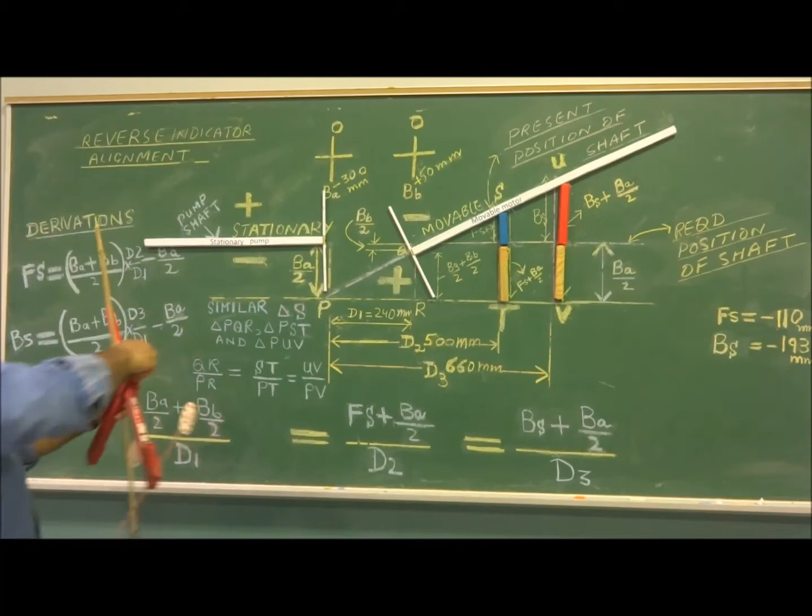Today we will discuss about reverse indicator alignment method. In reverse indicator alignment method, we make the alignment in one step, both for angular misalignment and for offset misalignment. Although we are taking readings on the rims of the couplings, we get the solution for both angular and offset misalignment. We are not taking any reading on the face. Today we will discuss about reverse indicator alignment method. I will discuss only vertical alignment method.

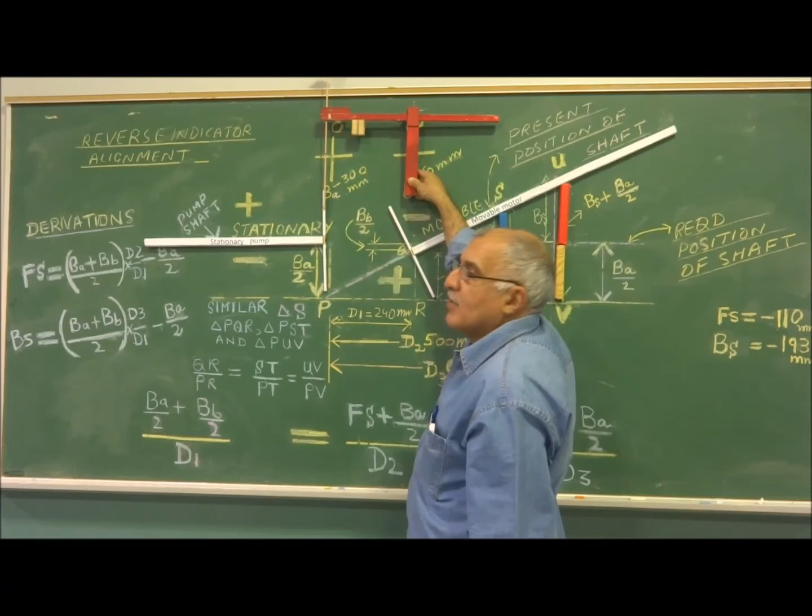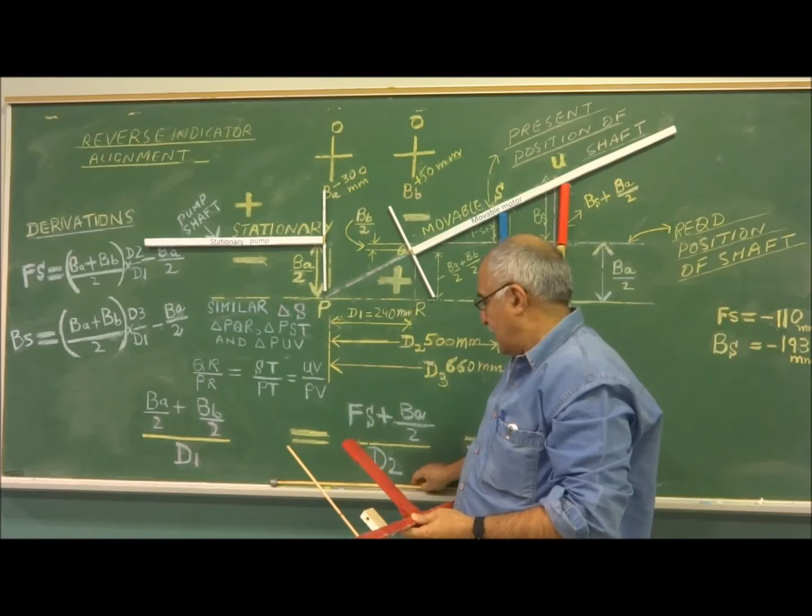Vertical means up and down, and I will tell you how we derive these formulas and how we make alignment. So in reverse indicator alignment method, we use two dial indicators. With one dial indicator, we take reading on the stationary unit. Stationary unit means where we are not going to add or remove the shims. So we make 0 on the top, and then we go to the bottom, and then we take the reading on the bottom side. This is our total vertical reading, which is called BA.

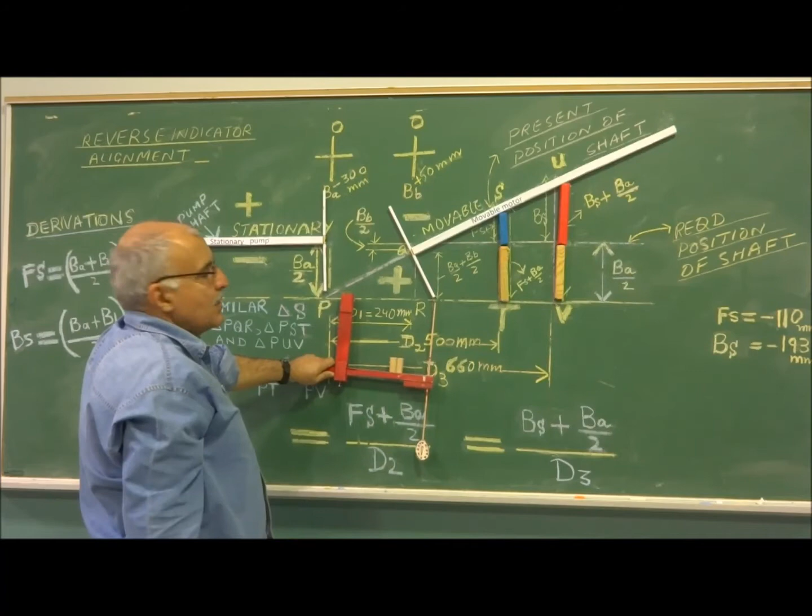Here you can see it is minus 300 millimeter total reading. In the same way, we take another reading on the movable side. We make 0 on the top, and then we come on the bottom, and this is the total offset reading with dial indicator, and this is called BB. BB is the reading taken on the movable side. This is total vertical reading, offset reading by dial indicator. Movable unit means where we are going to add or remove the shims for making alignment.

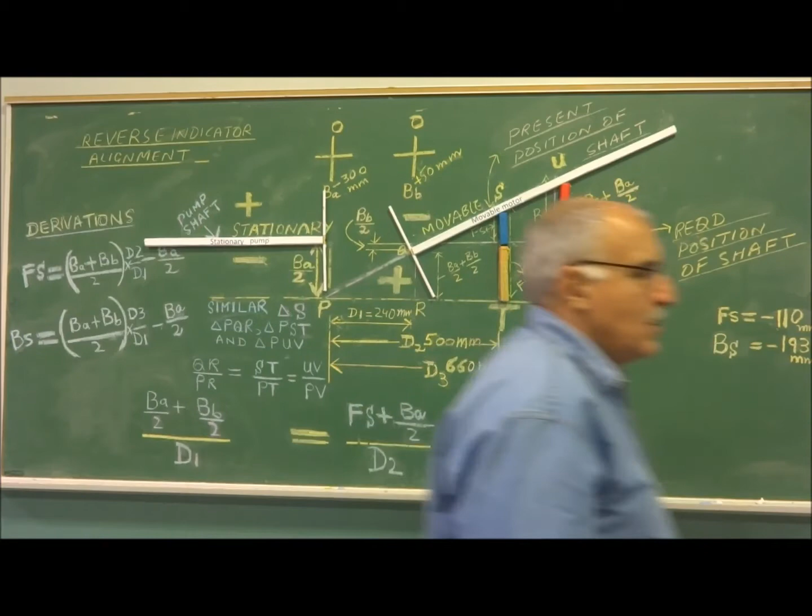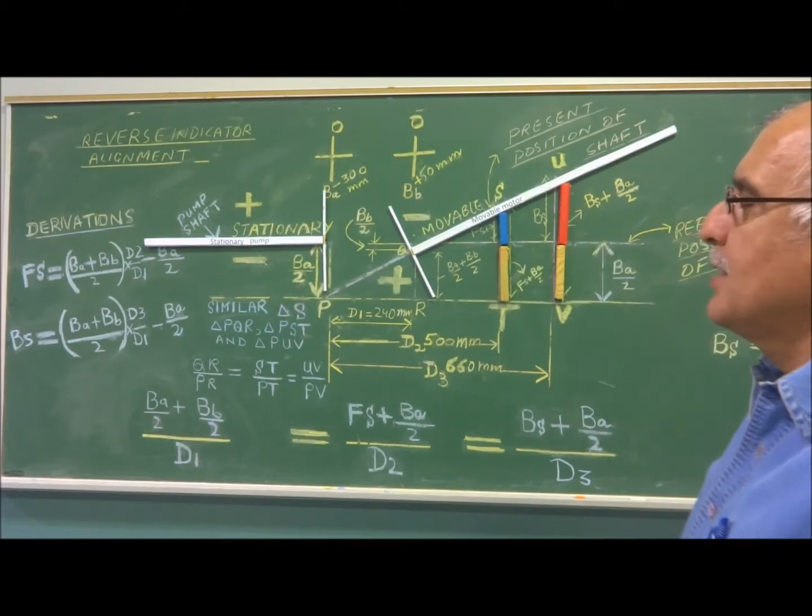Now for making alignment by reverse indicator method, when I say that we will make alignment, it means that we will make alignment for both angular misalignment and for offset misalignment. We will make correction for the offset misalignment, and we will make the correction for angular misalignment. Although we are not taking any reading on the face, remember, we are taking both readings on the rim of the coupling. You can take the reading anywhere, but we don't take this reading on the face.

So one is stationary machine and the other is movable machine. Movable machine is the one where we are going to add or remove the shims on the front and back foot for making alignment. Stationary machine is the one where we are not going to add or remove the shims.

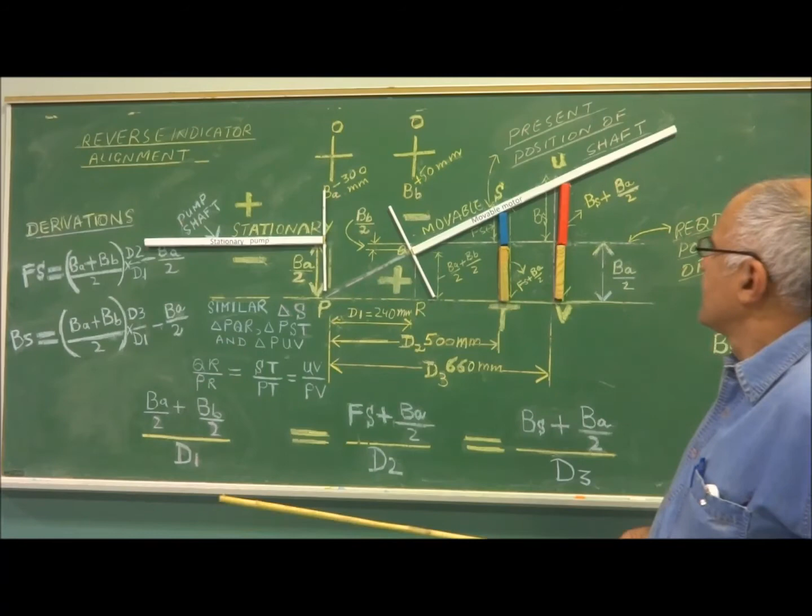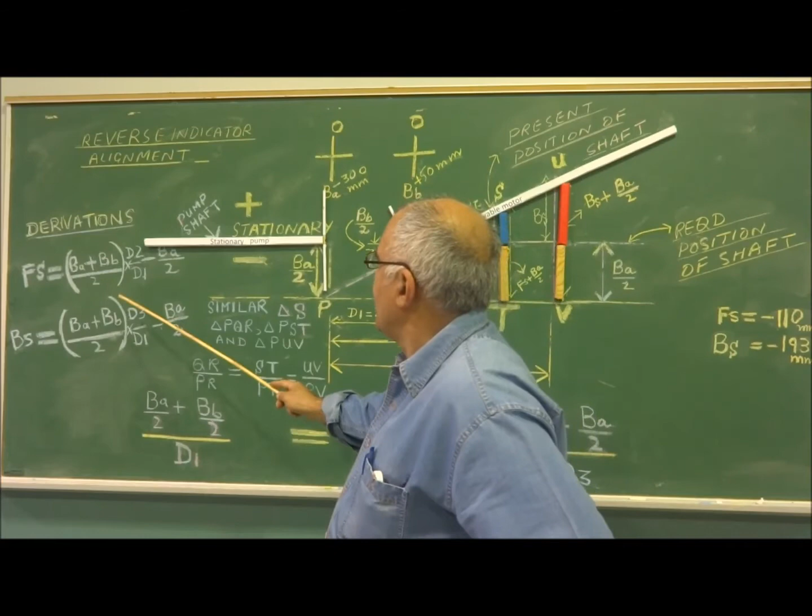So for finding the amount of shims for making alignment, we use these two formulas, Fs and Bs, and you can see here there are 5 terms which are used in these formulas: BA, BB, D1, D2 and D3. So total there are 5 measurements which you have to make for finding the amount of shims for front foot and back foot. Now in this method, when you take the readings from dial indicator, make sure that the front foot bolt and the back foot bolt are tight.

Otherwise you will get wrong dial indicator reading. And also you have to make correction for the soft foot. First you have to check if there is a soft foot, and if there is a soft foot, you have to make correction. This is very important. Otherwise you cannot make alignment. And then you will make rough alignment, because sometimes the readings are out of the range of dial indicator. So you have to do rough alignment before you use dial indicators. So how we are going to make alignment by reverse indicator method, this I will explain you.

We need total 5 measurements for finding the shims. BA is one measurement. This is the dial indicator reading on the rim of the coupling on the stationary side. This is the total offset reading. We make 0 on the top and then we go to the bottom. The second measurement is BB. BB is the reading taken by dial indicator on the rim of the coupling. We make 0 on the top, then we take the total reading on the bottom. Here BB is plus 50 and BA is minus 300. This is the front foot, this is the back foot.

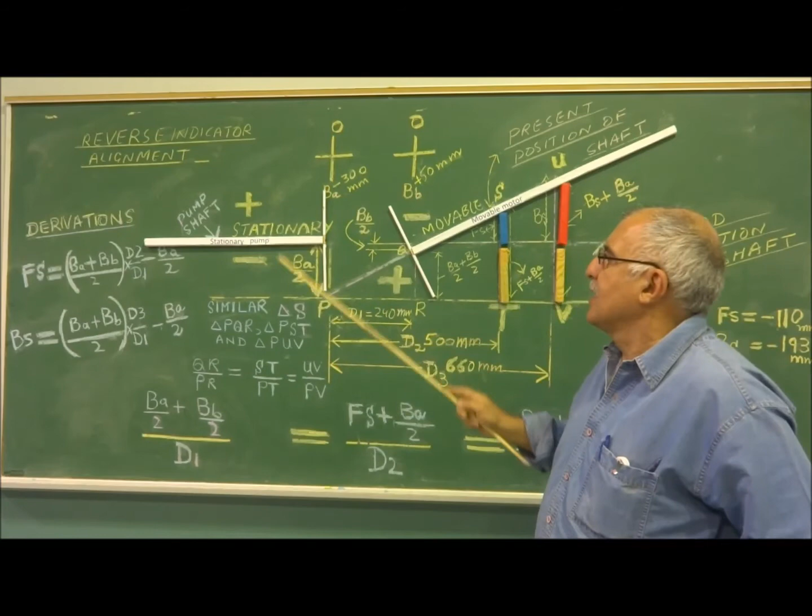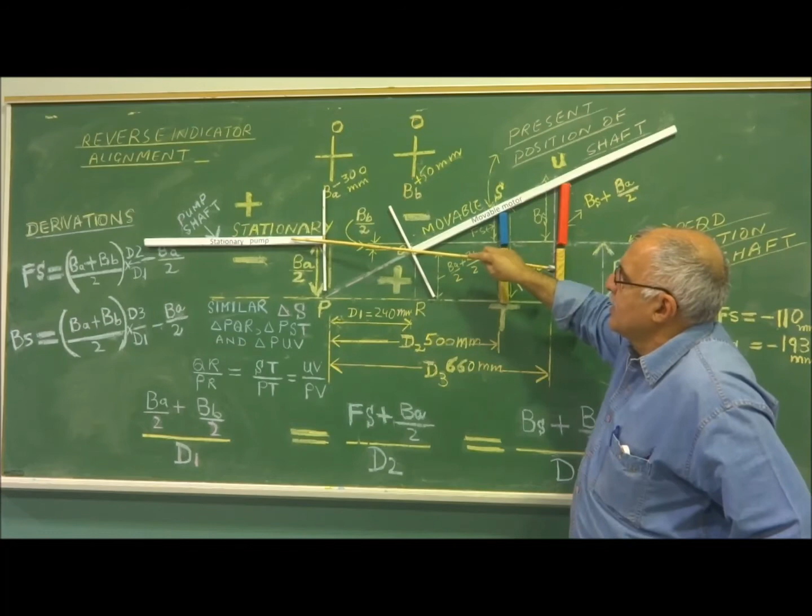It will stay where it is, and its rotating line will be taken as a reference line. So we have to move this movable motor in the same line as the rotating shaft line of the stationary machine. This is our main reference line, and we have to move this motor shaft in the same line as the stationary machine shaft line, which is, you can see here, this is the required line, and this line is in the same line as the stationary pump shaft rotating line.

So this is called the required position of shaft, and this is the present position of shaft. Movable unit means where we are going to add or remove shims for making an alignment. So why do we write here minus and plus and minus and plus? I will explain that.

If you take the reading at this point from the dial indicator, and the alignment fixture is fixed on the movable machine, then if you get a minus reading, it means the shaft will be passing below this point. Because this shaft is not going to move up or down, it will stay as it is. So if I get a minus reading, it means this shaft is passing below this point where I am taking the reading, because a minus reading is only possible if the shaft is passing below this point. So if I am getting minus 300, it means this shaft is passing below this point.

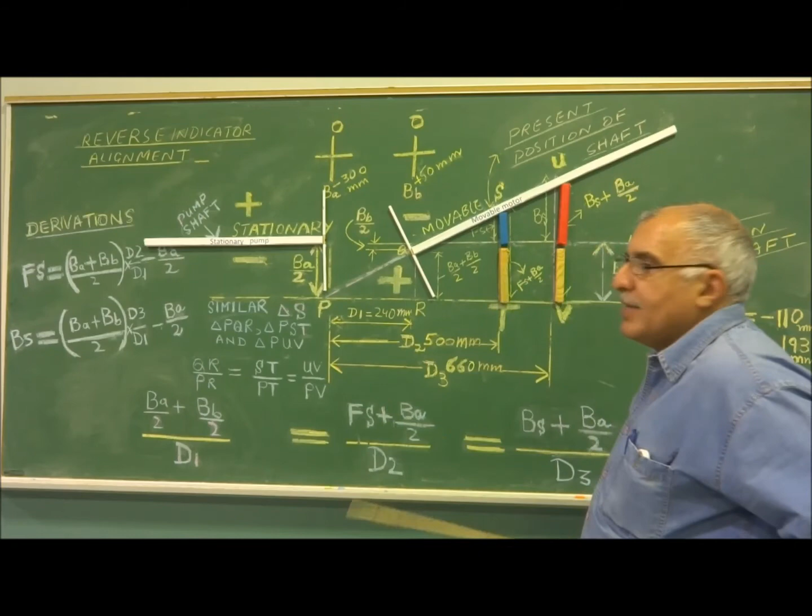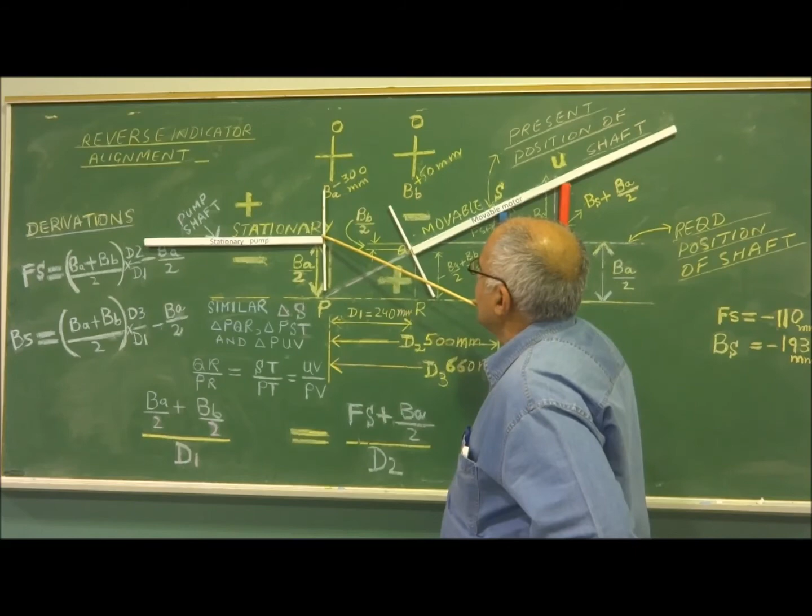In the same way, if the reading is plus, it means this shaft must be passing above this point, because this is the point where I am taking the reading with the dial indicator on the stationary shaft. Same way here on the movable machine. Now with the stationary pump, I am taking the reading on the movable machine. The alignment fixture is fixed on the pump, and with the dial indicator I am taking the reading on the movable side.

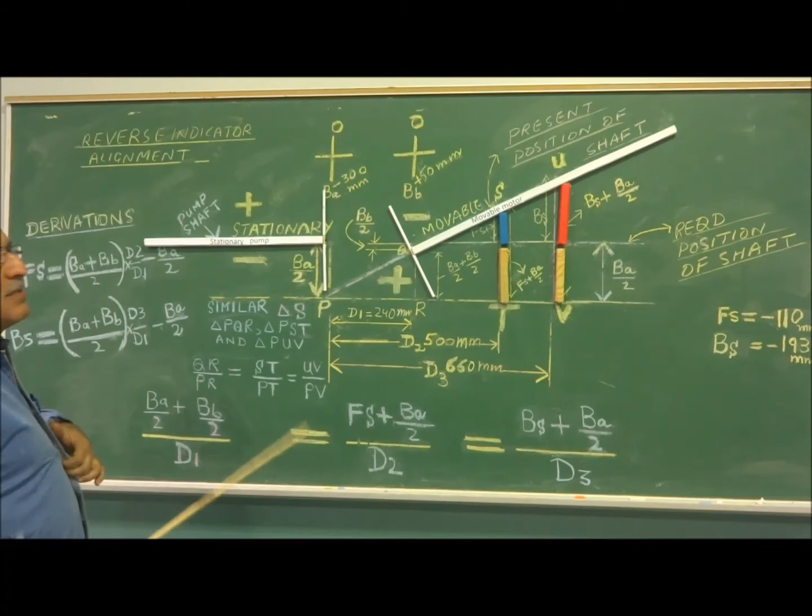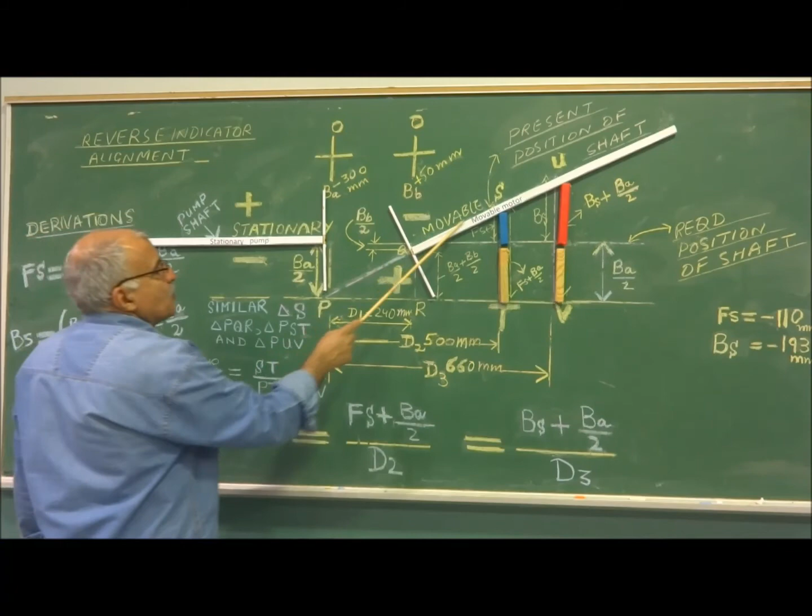Now when I talk about plus and minus, this is with reference to the required position of the shaft, not with reference to this shaft. As I was talking minus and plus, it was with reference to this stationary shaft position. But here I am not talking about this position, which is the present position of the motor. You can say it will be with reference to the required position of the shaft, which is in the same line as the stationary pump shaft line.

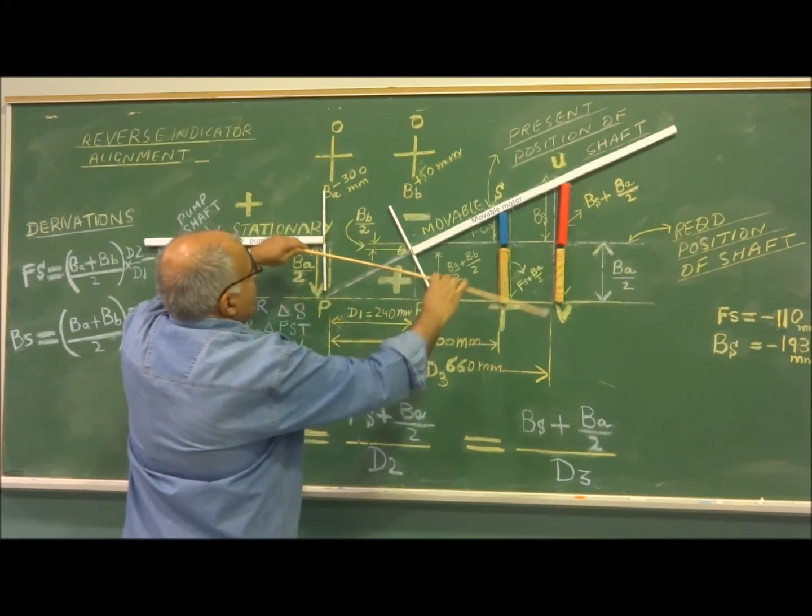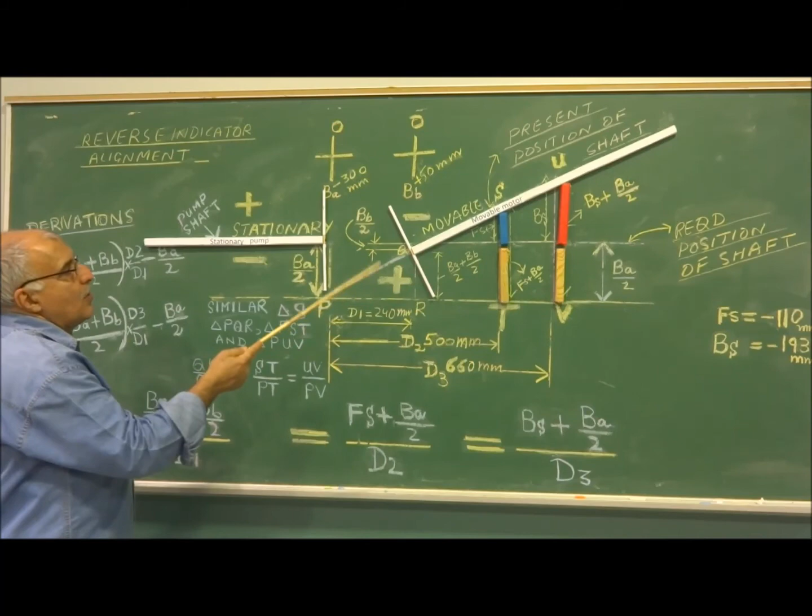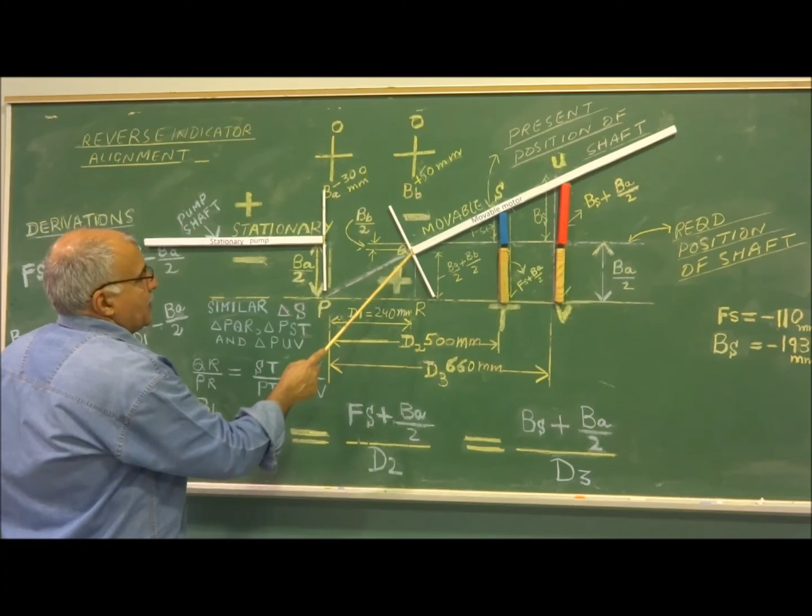You can see here, this is the line, this is the required line where we want our movable motor to shift. So when I get a plus reading on the movable side, I mean if I get Bb plus, it means the point where I am getting plus reading on the shaft is below the required axis. That's why I am getting plus. The plus sign is below the required axis.

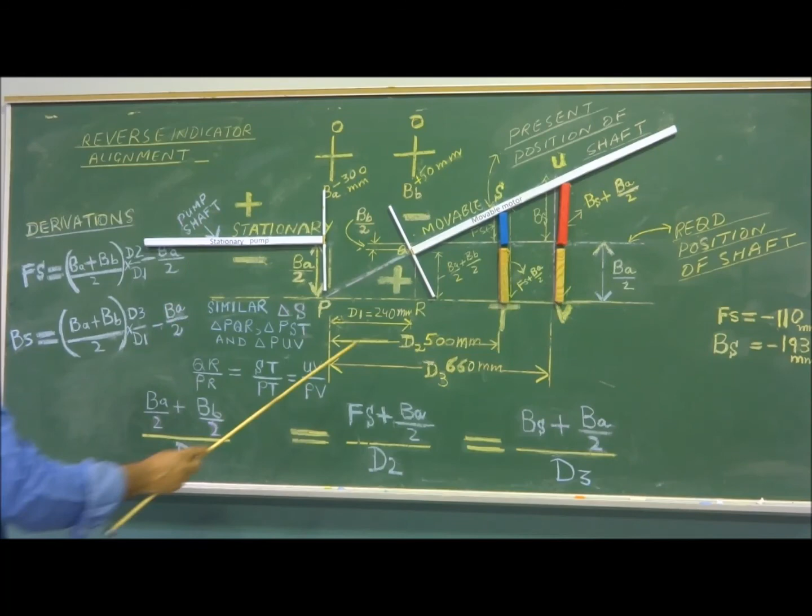If I am getting a minus reading at this point, at the end of the shaft, it means the end of the shaft is above the required axis, which is this line. So I can now allot the minus and plus sign to these four areas. This is the minus zone, this is the minus area, this is the plus area, this is the plus area here, and this is a minus area. The plus area is below this required axis, and the minus area is above the required axis.

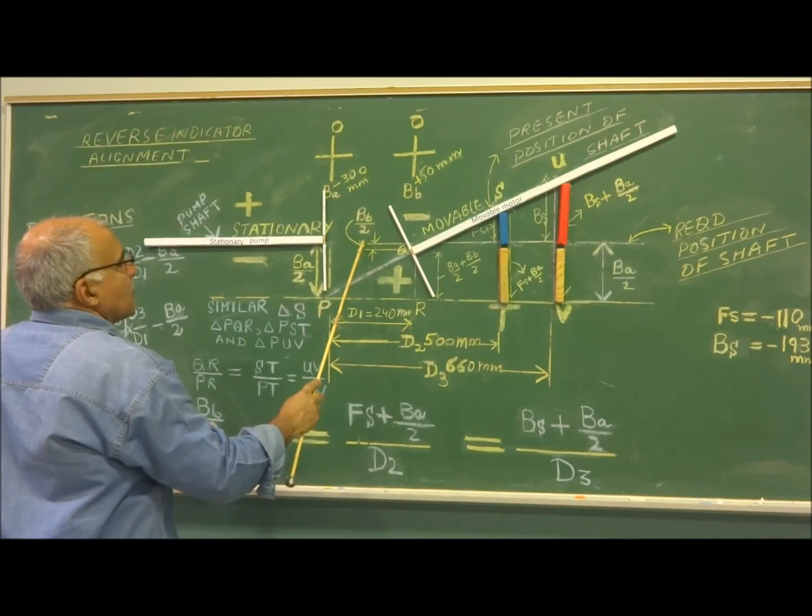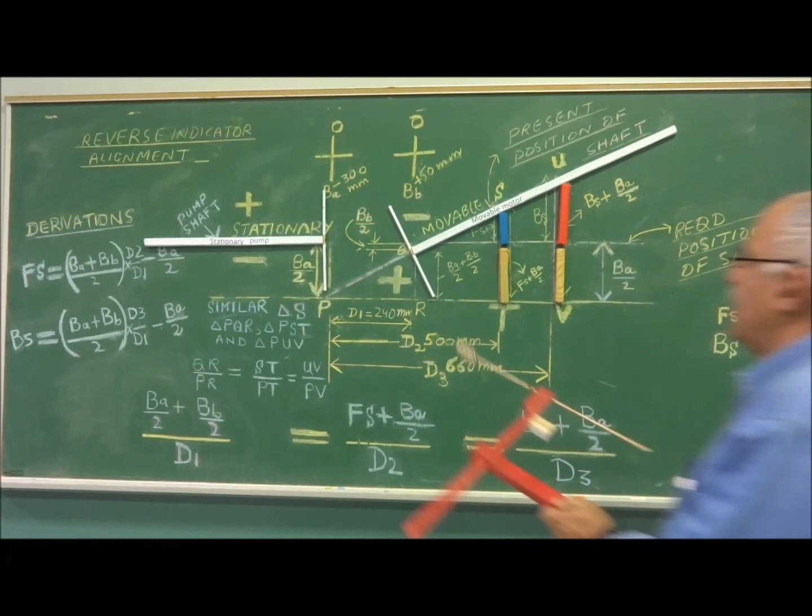So, how do we take the readings? You can see here, when I take the reading on the movable side, which is Bb, I make zero on the top.